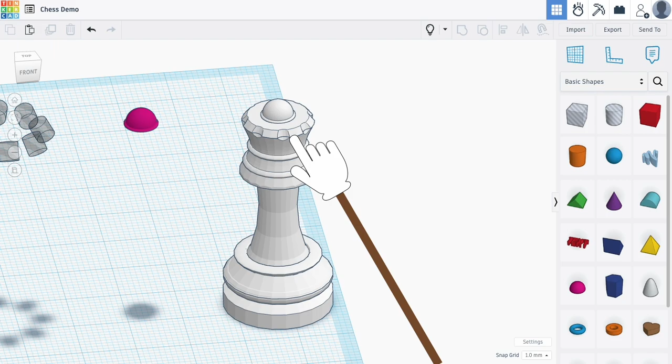So here is the queen. We have finished all of our other pieces and moved on to this one, and it is pretty much the same as the others, except a little different. We have a top here with a nice interesting curve to it, and then this cutout pattern on the very top with some rings and a ball on top.

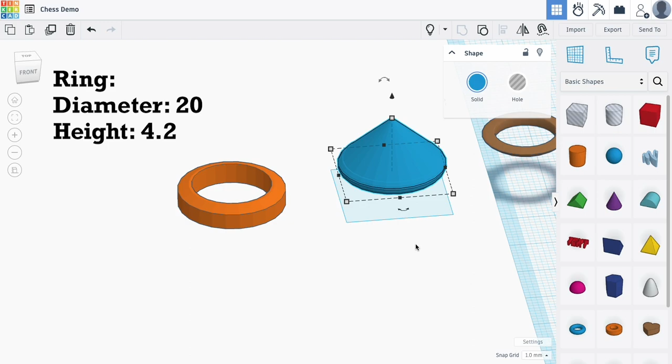You may notice that the queen is actually slightly thicker than the other pieces, and that's because as we get more powerful with our pieces, each one should be a little more prominent. So my ring down here is still 20 by 20, but this cone part has grown to be 12, and that gives it a little bit more substance.

We also are taking this ring, it is 16 by 16, and its height is 2, and it's going to sit on top of there nicely.

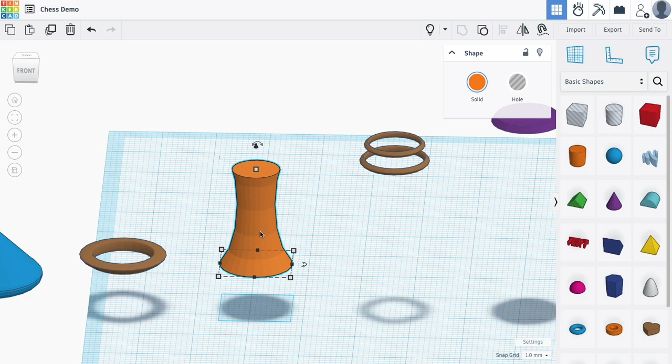And then the column, I've also changed this a little bit, where the top piece that cuts it off has been moved off the ground a little further. That way exposing a little bit more of the curve and giving the queen some more height so that she is shown as a more prominent object. Mine is 28 off of the ground, and that's the only change I've made to that column.

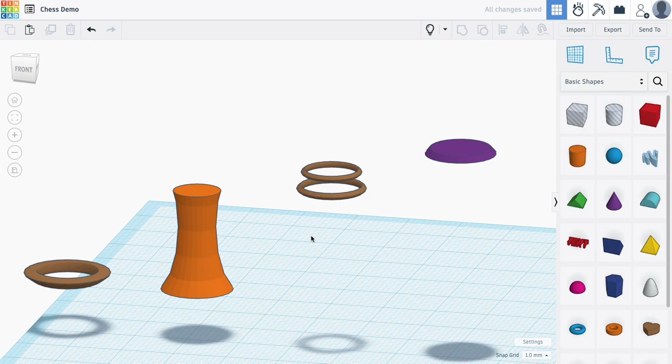These two rings, one of them is about 12.86 by 86, with a height of 1.15. The other one is 11.2 in diameter with a height of 1. And those are what go around.

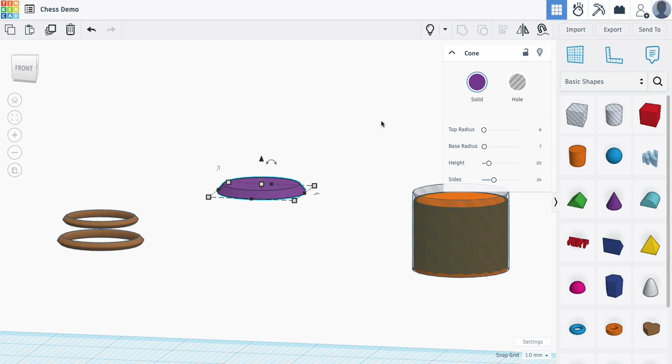And then here we have another object, and that is a cone. You can see that the top radius is actually 6, and that's what creates that sort of flat look to it. So one of the parameters of your cone is to have a top radius and a bottom radius, and that can create that little taper effect.

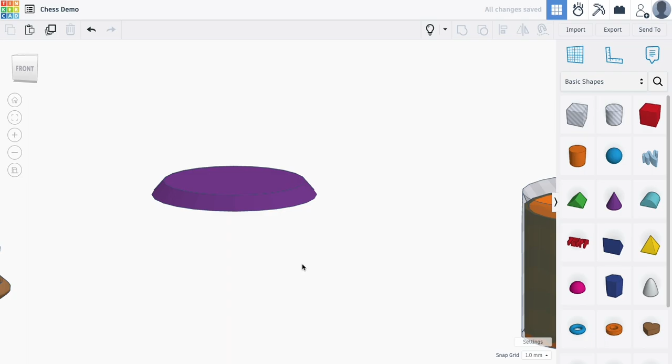There are other ways you can actually do that. You can do that with a column and a bevel, and that would also work. This part is the head, and this is a little bit more tricky.

This one we have a ring again, and this time the shape of the ring fits around our cylinder. So here's a cylinder that is 14 by 14. My ring is 14.4 by 14.4, so only slightly bigger. And then I've gone ahead and drawn in this sort of shape.

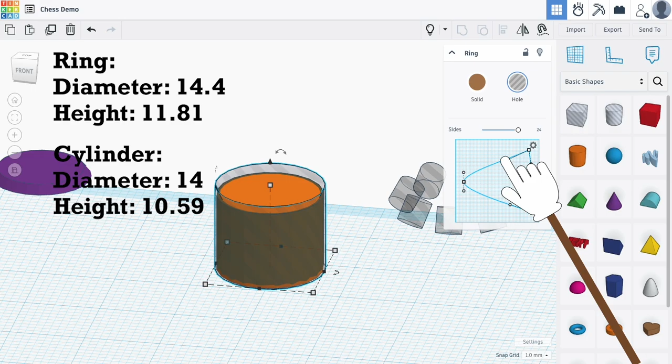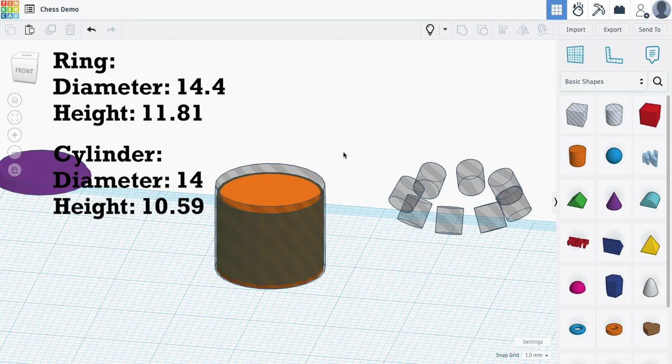This is a very deep angle here. Yours doesn't have to be perfect, but you can kind of try to sculpt that thing around a little bit to make it just right, and that is what we're going to do. The height of the column I've got is 10.59, and the ring height is going to be 11.81. When I group these together, that's where I get that interesting shape.

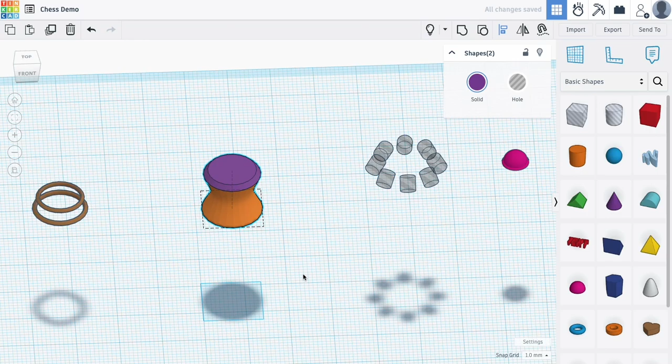Now, all you have to do is cut out this pattern here on top. This is a circular pattern, and it's a little bit tricky to make this happen. I'm going to go ahead and put these guys together so you can see exactly what I did. So right here I had this shape.

And what we want to do is kind of cut out some notches all the way around, and we did that using one of these cylinders. This cylinder is pretty small. So if I were to demonstrate that from the beginning, I'm going to take this cylinder and lay it directly on the side of this object.

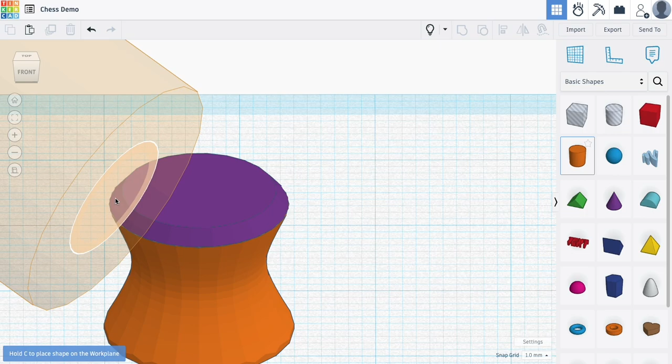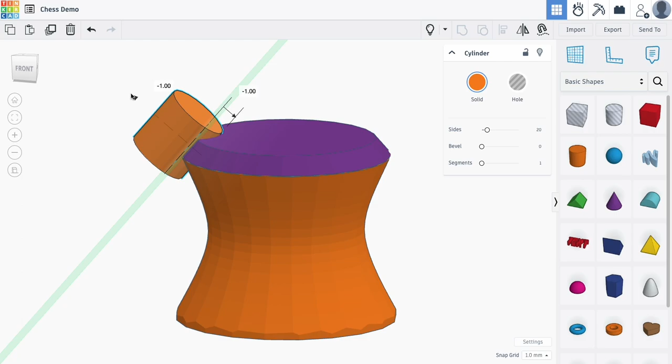Might help to be on one of these sides. And then I changed the angle, 90 degrees, and then brought this thing down to be tiny, around 4 by 4. What that does is allow this thing to sit exactly on the side of that object. Then we can go ahead and move the Z-axis down, probably 1 or less. You might need to change your snap settings if you'd like to make this maybe a half, because it's just a little notch. And that gets us started.

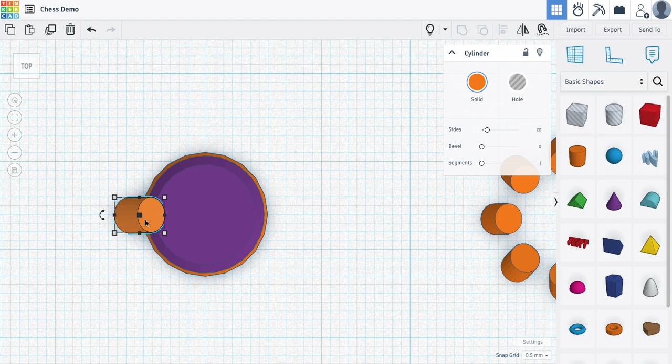If we were to look at this from the top, now I have that object there. I'm going to go ahead and copy it to the other side and tell it to reverse. I'm going to use a mirror here, mirror this way, and we want it to also go in on that same edge.

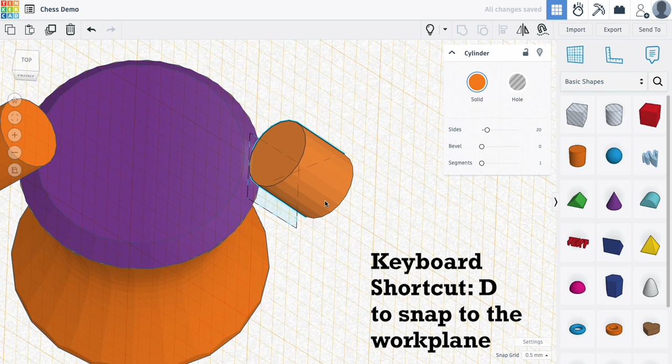So we can use our work plane, and this time we're going to identify that plane, press D to make that thing push in there all the way, make sure it's up just enough. And then we're going to go ahead and cut in again a unit, and that gets us that other opposing side. That looks actually pretty good.

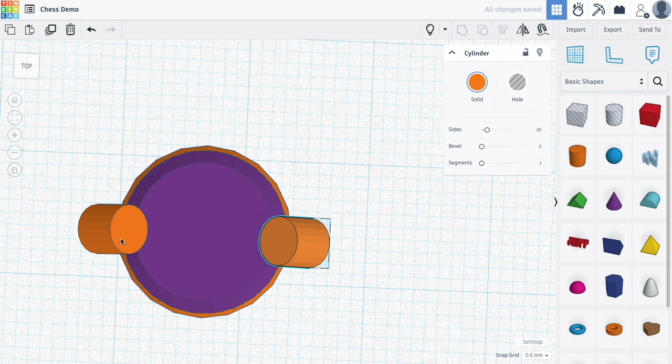Now what we want to do is reset my work plane. We're going to take this thing and press the duplicate button. Then without deselecting, we're going to keep that selected, select again, and move 45 degrees, then press duplicate 6 more times, and that is how we get that sort of ring.

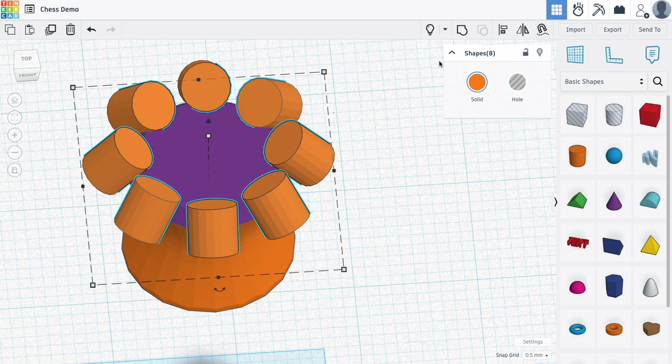Once you have all of those in there, we can go ahead and turn them into a group, turn that group into a hole, and that is how we make that top piece. But then we can cut these pieces like so, group, and that's how we end up with that kind of riveted design. The last part is this sort of circle.

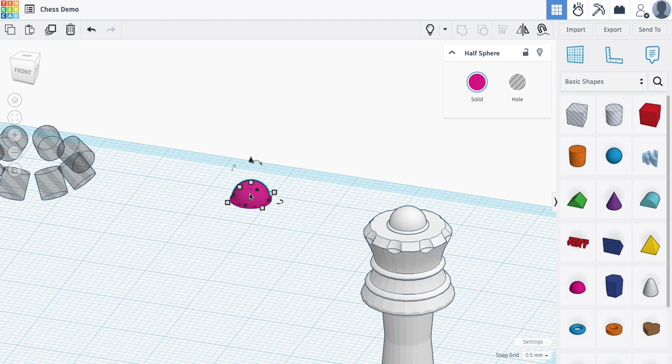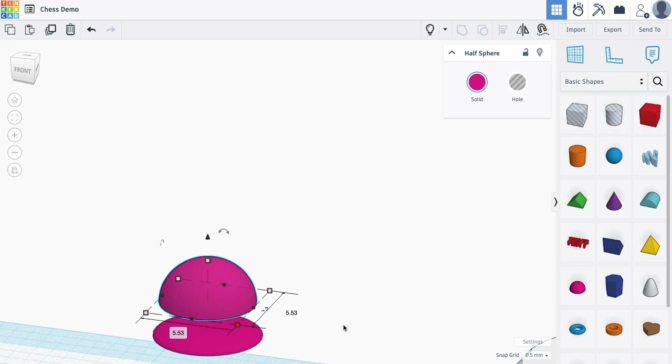You can actually just have a half sphere go in there, and then on the bottom I have another half sphere that just happens to be shrunk down a little bit. The height on this one is 0.6 and its width is 6.7. The height on my bigger sphere is 2.5, and the bottom diameter is 5.53.

So that is how the queen gets put together. Once you have all those pieces done, again, you can line them all up and group them, and that's how we ended up with this particular queen, and that is the end of this video.